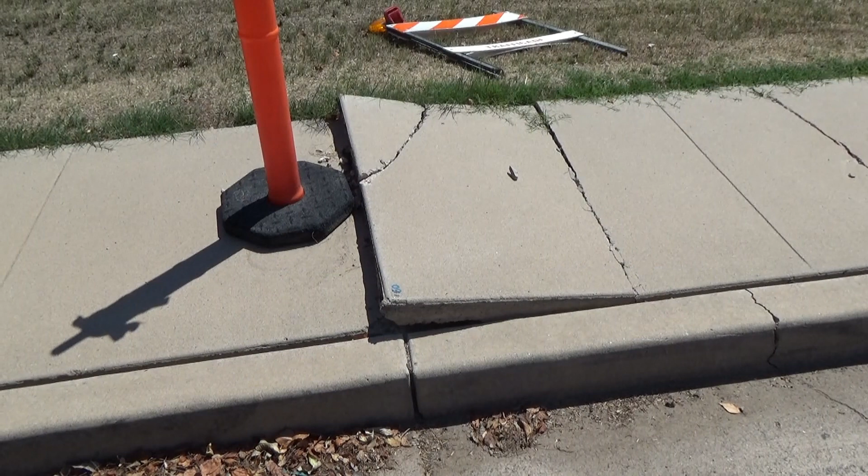Here's a common sight in the summer here in the desert where I live. You can see the concrete has expanded in the heat, and there was not sufficient expansion joints, so the concrete had to go somewhere, and it goes up and creates a little temporary hill in the sidewalk. In the heat of summer in the desert, you can see these all over town. So when we're laying track, we have to take that into account. Heat expansion is something we deal with here in the desert.

So I'm using aluminum rail. Here you can see my stash, which hopefully at some point will become a railroad. It's aluminum - I'm not so sure if it's pure aluminum or some sort of an alloy.

So I thought it would be interesting if I could come up with a formula - that's why I broke out my Excel spreadsheet here - that would tell me how much of a gap to leave depending on the ambient temperature at the time. If I'm laying track in the winter or in the summer, I need to put gaps between the rails where the track panels join so that my rail doesn't kink out and cause problems.

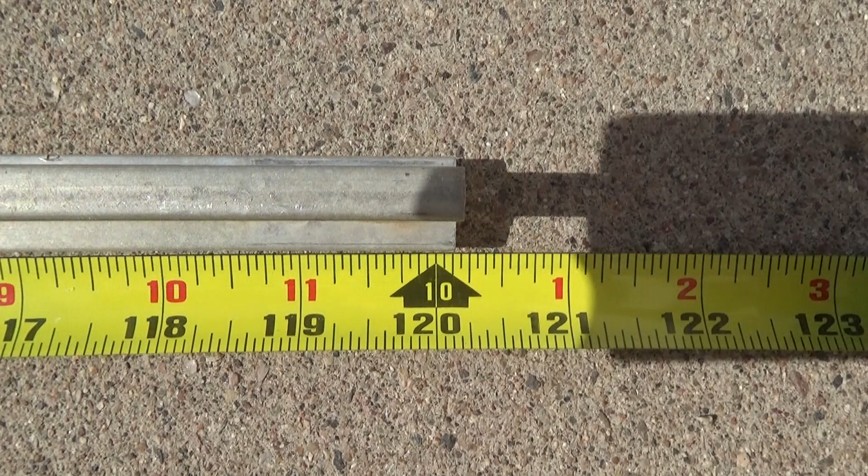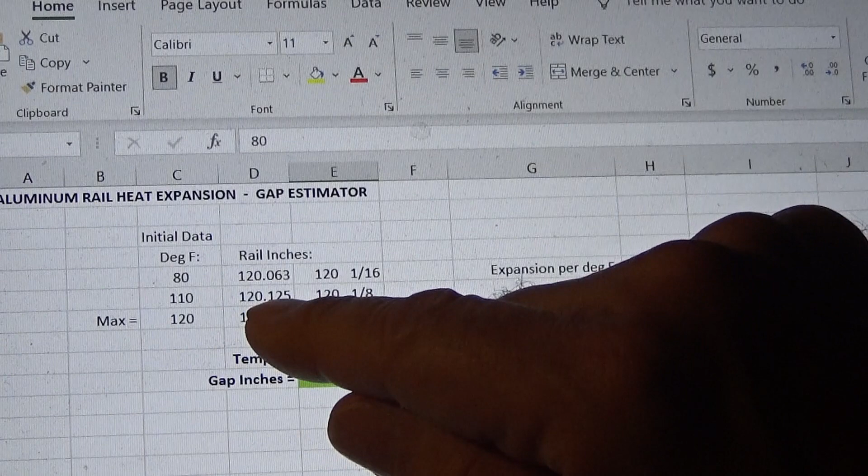This is kind of what I came up with. The very first thing I had to do was take a measurement. So I took my rail, which is going to be 10-foot sections, and went out and took a couple of measurements. The temperature got up to 110 Fahrenheit ambient, and I recorded carefully the length of that track section: 120.125 inches, or 120 and an eighth. So here we have decimal inches and here we have fractional inches.

I was careful to keep my tape measure inside and not let it be affected by the heat. But I put that 10-foot rail out on the driveway and let it heat up all afternoon, then measured it. I brought it in the house, and with an ambient temperature of about 80 degrees, I came up with 120.063 inches.

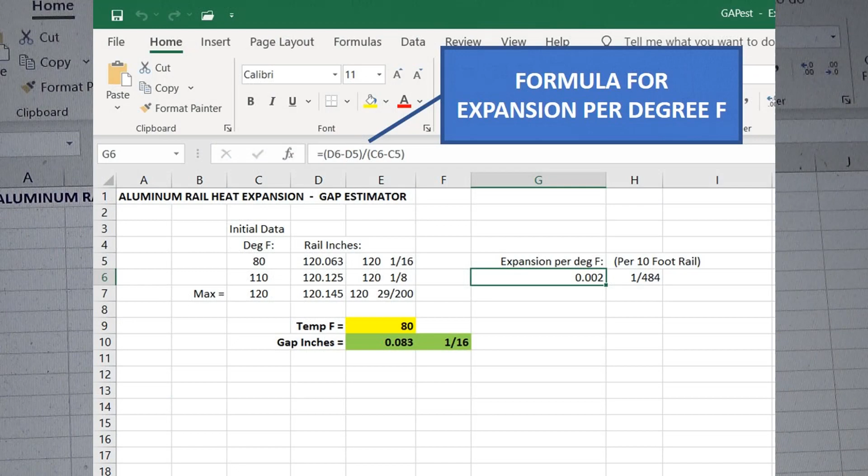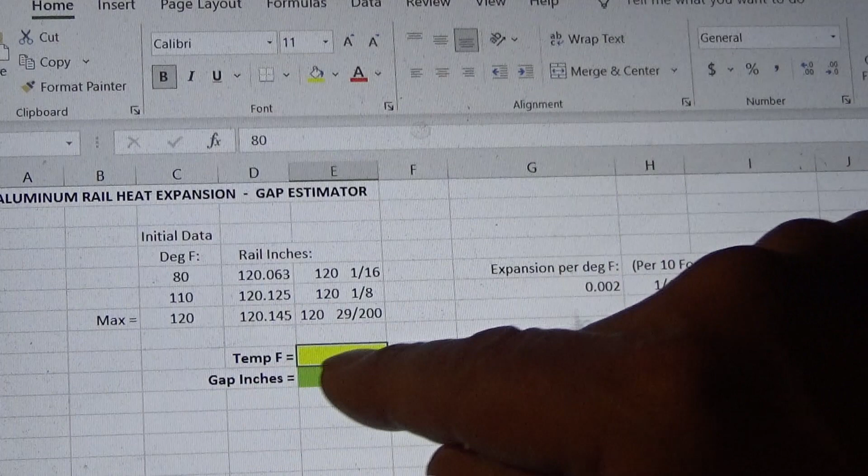So with those two measurements, I extrapolated the expansion per degree of Fahrenheit per 10-foot rail. According to my calculations, 0.002 expansion per degree Fahrenheit of a 10-foot rail, or about 1/500th of an inch - 1/484. So if I'm laying track at the hottest possible temperature, which would be, say, 120 Fahrenheit, I wanted to be able to simply type in the ambient temperature and have my formula tell me how much of a gap I need to leave on the rail.

So in this case, what's the worst case scenario? That would be 120 Fahrenheit. So theoretically, I would not have to leave a gap in the rail at 120 Fahrenheit.

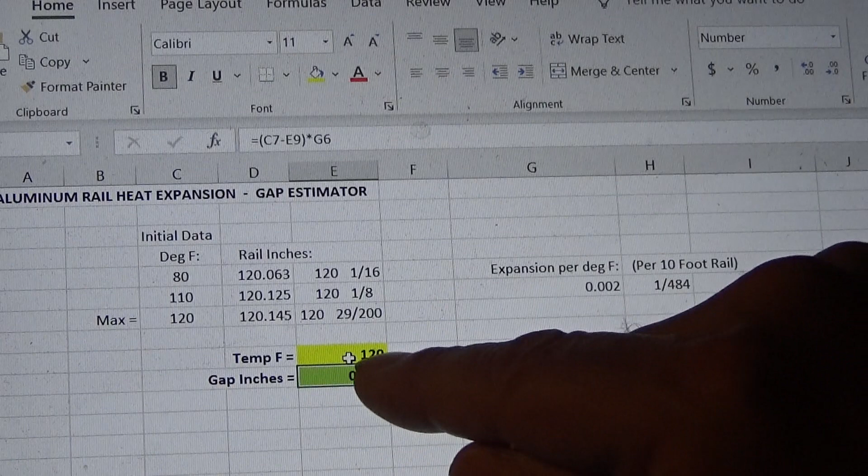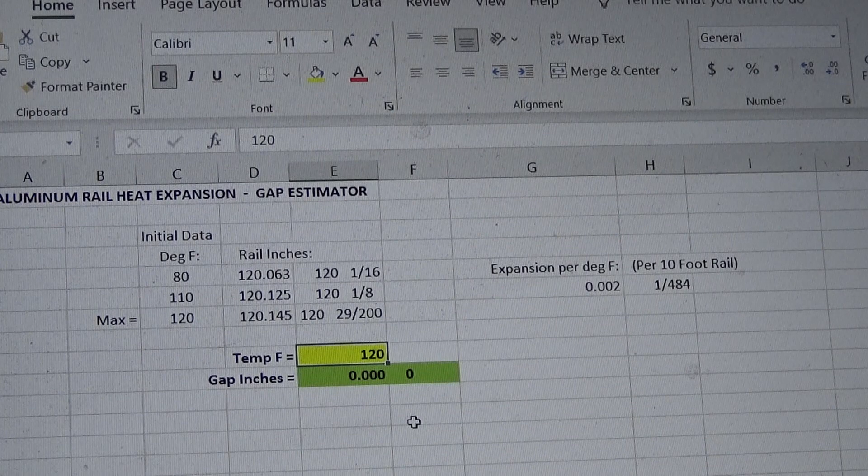But if I'm laying rail in the winter, what was the coldest day? Maybe freezing - it rarely gets to freezing here, but sometimes it does. So let's say 36 degrees Fahrenheit. I would want to have 3/16 inch of a gap between my rail as I lay the panels if I were laying in the dead of winter. Here where I live in the Phoenix area, you could get anywhere from freezing overnight all the way up to 120 degrees in the dead of summer. That's quite a temperature range, and we need to take that into consideration when laying aluminum rail.

Steel rail doesn't expand so much, but aluminum does expand with heat quite noticeably. Let me know what you think of this crazy spreadsheet idea, and whether your experience agrees with this or not.

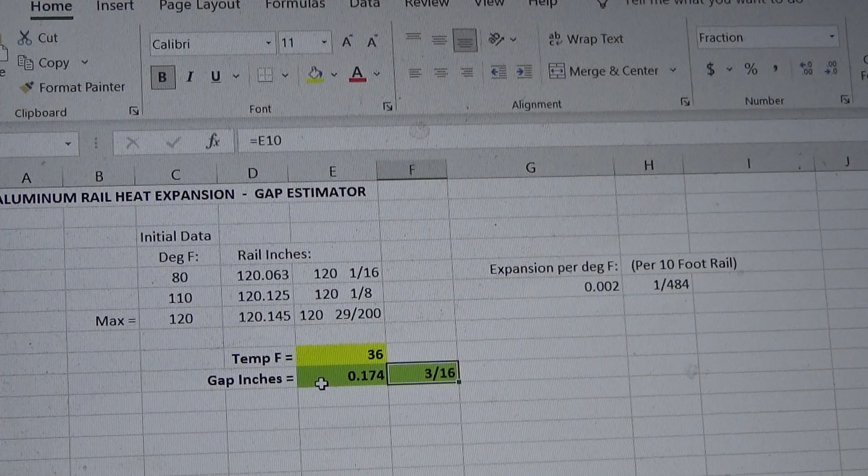So here's my gap, here's the formula. Excel is able to just convert a decimal inch to a fraction simply if you go under formatting of the cells, and you can tell it to display your answer in fractions or decimal. That's the easy part. But I needed a reference point to come up with a per degree Fahrenheit expansion rate per my 10-foot rail. And of course, your calculations might be very different.